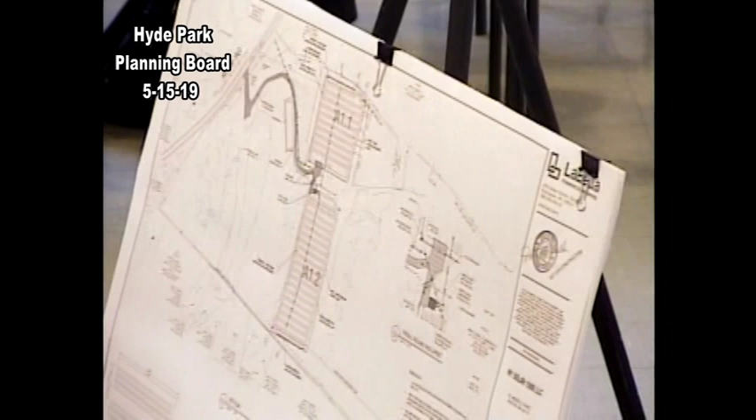We also put into the record last time that it's a seasonal kind of wetland. I've been there twice, and one time there was standing water, one time there wasn't. This is during the heavier rain season that we've had, like right now. So, thank you.

Okay, the overhead line issue was addressed in what we filed last week, included. I've also forwarded a communication from Central Hudson, which briefly describes their preference for overhead line at the interconnection point.

Right, I was going to say, our code requires it be buried to the maximum extent practical or possible. So we would try to bury it as it goes from the arrays over to the connection point, but once there, Central Hudson has a strong preference apparently for it to be overhead because that's what they're used to using. They're an organization slow to change, I'll leave it at that.

Okay, and for ATHANAS, the traffic impact issue we addressed in the filing. Yes, I want to thank you for submitting the traffic impact narrative so quickly. It enabled our consultant to go through and review it and fill out the part 2 for us.

Nope, that's it. Let me start with our consultants. Any comments, Ms. Axelson? Following up on the traffic, I was very surprised at the request for a traffic impact study, and I looked at your narrative, and it was very helpful. I did a little worst case based on a certain number of vehicles and figured out that there might be 144 total trips per year, which is 0.4 trips per day.

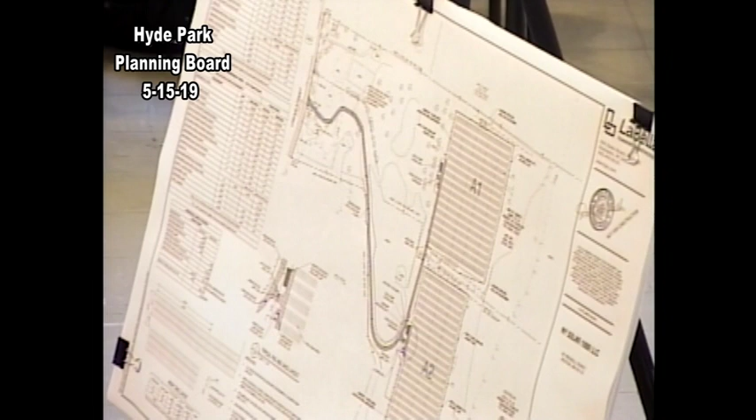It was confirmed after the last meeting that the electrical line that runs north-south will be buried. The electrical line that will transmit the energy down to the connection point is proposed to be elevated.

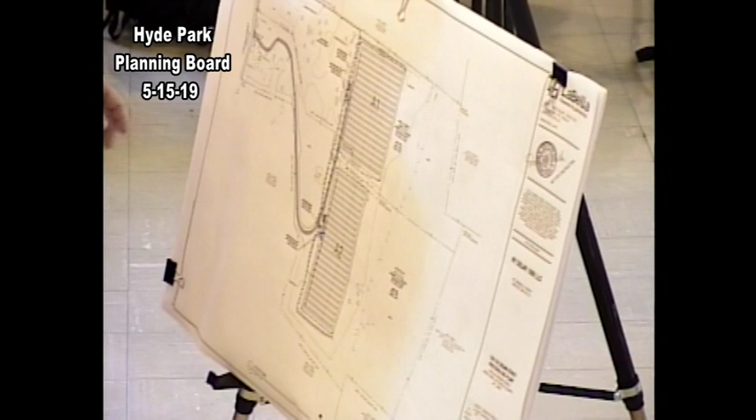That's actually shown on the other side. There you go. I believe there's 4 poles, if I counted correctly. Yes, along the way. The applicants have indicated that they believe this is better to hide the poles within the existing tree line. Also it will result in less removal of tree lines than if it had to be trenched and buried.

That certainly would please me, put it that way, because it means there's additional buffering that's intact, that's natural to the adjacent parcel, but I'll let the rest of the board address that. I think that was the only issue that was outstanding.

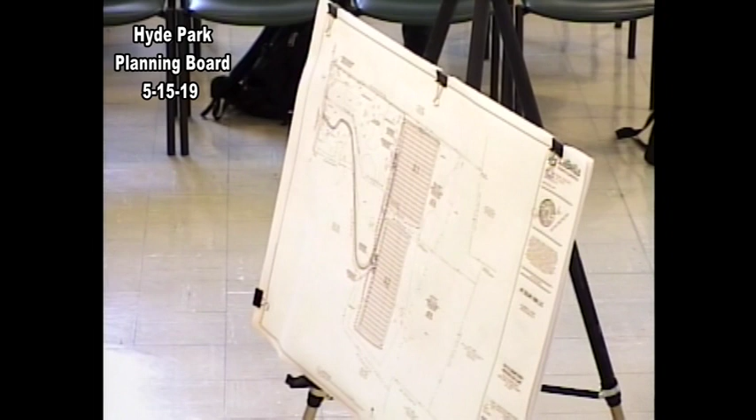Can you just remind me, we had public comment, where was the public concerned about? Along here, because this extends up—this is one of those spots where if you're across the street you would see the sunrise right around here, and they didn't want it poking through, seeing the sunrise through electrical lines.

So they're buried, and I believe Mr. Horan said he had no problems with it being elevated or not buried along the side, because that wouldn't really be in anybody's sight line, except for the property here if you're facing that direction or facing this direction.

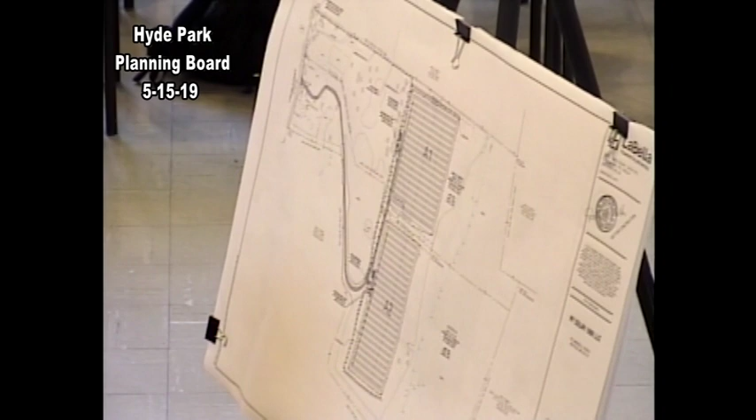Anything else you'd like to add? Well, since I'd given you linear feet of line last time which turned out not to be right, I just wanted to give you the new data: underground line comprises 2,330 linear feet and overhead now 1,080 linear feet. Again, as Mr. Dupree said, the east-west portion along the property line.

And the seed mix issues and the wetlands encroachment issues were similar—same thing, right. So nothing additional.

Thank you. Comments, Ms. Axelson? Actually, I have a question. I just looked at the submittal quickly to be able to speak about readiness for SEQR negative declaration on both Athanas East and Cream Street, but I assumed that we were to go ahead and do a thorough review of the submittal and generate a review memorandum. Oh, absolutely. Okay, fine, that's it.

Because we'll be in a public hearing in 2 weeks, and I'd like to have any comments on the revisions as we go forward. And whatever I said about Athanas East applies here too. Thank you, there you go, ditto. We're being very efficient tonight.

That's great. Comments, Mr. Satara? Not for SEQR, no. Any other comments you want to throw in now? No, I mean there's some items we're gonna be reviewing on their current submission. I know we had some on the drainage and the access road, so we'll look at those.

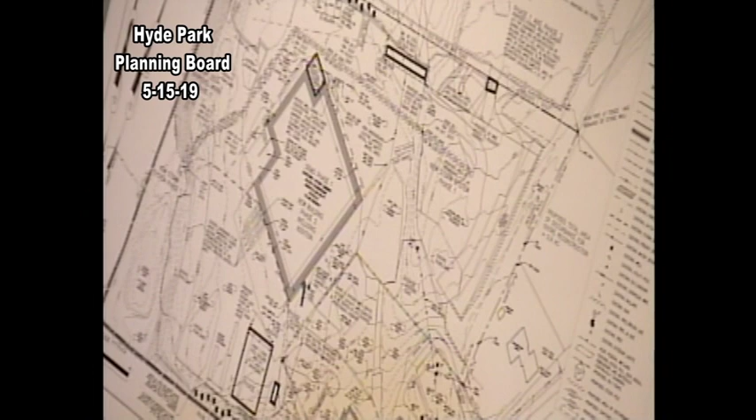Before the fire, it was tough because the building being like a beige color, it kind of blended in with everything else. And I'll point out that the reason why they're in for special use permit is there's already an expansion of the use. There's a storage area in through here where it was originally trees. And they're also proposing the addition of new buildings and to square off the corner right here, as well as a few other things. So they've calculated the percentage increase that they're looking for.

But let me turn it over to you guys, and please state your name for the record, and remember to use the microphone as you go around. And there's also a portable one, so you can pass that around, too. Okay. You're on. Joe Berger, Berger Engineering. Michelle Zerfus, Berger Engineering. Patrick Gleason, PLT. Laura Gleason Knoll, PLT.

Nice to meet you. We haven't met the other wife, so to speak, so far. The other wife. I'm not a wife. Unless you're a sister. Sister. Aha! I didn't know there was a third person. Oh, yeah. Patrick, Laura, Tommy. Yeah, PLT. Oh, PLT. Tom. There you go. Thank you.

Okay. Do you want to describe, I've already given a little bit of the actions that you're looking for, but do you want to go into detail for our TV audience? Basically, as everyone knows, we had a major fire on the site. The building has been basically burned at this point. We're still with the insurance companies on what's going on, and who knows when that's going to all be somewhat resolved. But we do have businesses on the site that employ over 35 people that we have to keep going. I just can't say stop while you guys find another job.

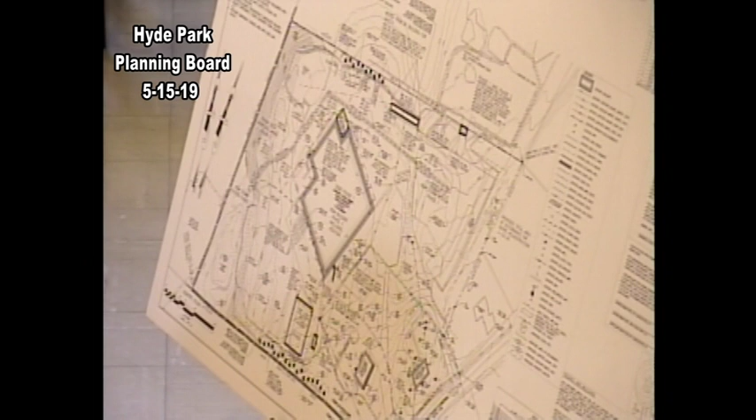So to be honest with you, the three issues for us are redoing the drainage from the drainage pond up, moving the fuel tanks to get them away from the building, and basically the little building, because we have our fingers crossed that everything can go right with engineering and permits, so that by October we have a place for the mechanics to go to for the winter.

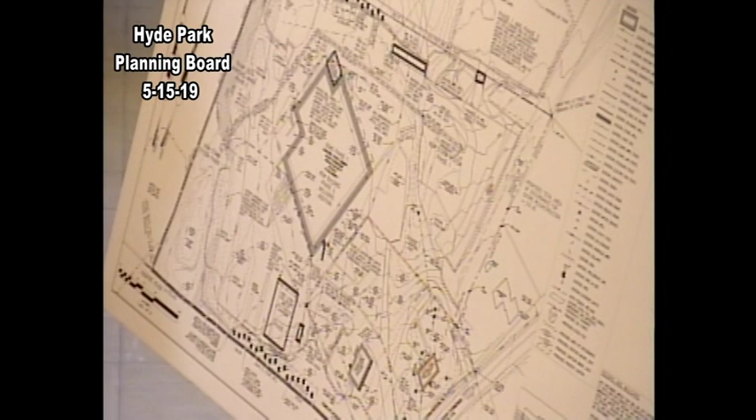It's just the struggle day by day of, all right, now what do we do? Let's try to do this, or let's try to do that. And like I said, even though most of the construction work is usually somewhere else, it's still the home base for everything to come back to at night. And the reason for going up into Mr. Baxter's property is that when we do demo the building, we're going to need a lot of room, and with everything going on, there's just not enough room at this point.

I don't know if there's any questions on your end. You'll hear them in a little bit. Mr. Berger or Mrs. Zerfus, do you want to add anything technical to what Mr. Gleason had to say?

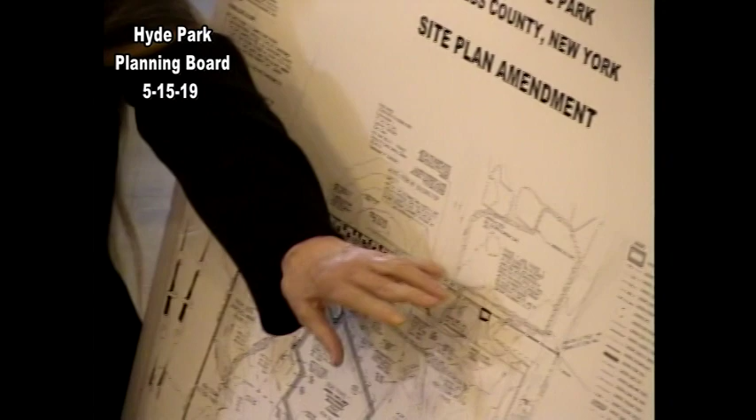You're going to have to hold it right up. The property line for PLT is right here, and this is their site. So what they want to do is just cut through; there's like one or two trees they'd have to take down to make a breakthrough here, go over to this property, and put down some material just to protect it. This is a big hay field right now. Then they can move stuff onto here.

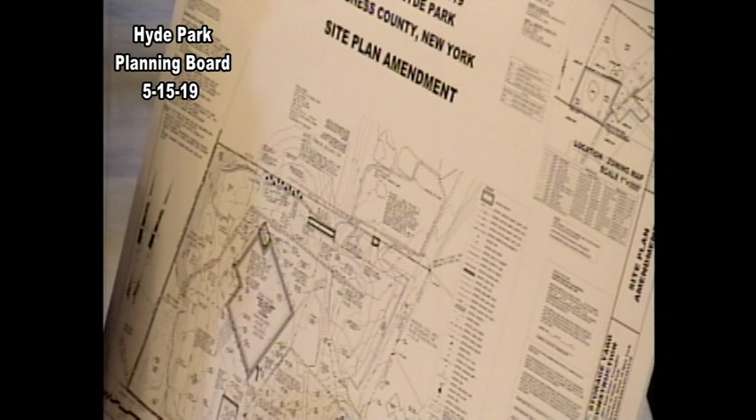There'd be silt fence and protection. That way they could work, everything would be up on here. Then when they were done and got all their equipment back off, they could restore this. The total disturbance would be less than an acre, about 7/10 of an acre up here, and it's a hay field they'll be going over. So that's what this extra is, a temporary pass-through, and because it's here, none of the stuff has to go out onto the road to use the site.

Can you explain the phasing, what goes with what? Yes. Initially, because right now the fuel tanks are right here by the building, and the building no longer has power, they've been having to use generators to pump fuel out of the tanks, which is kind of a dangerous thing.

So what they'd like to do is to be able to put these tanks up here as soon as possible, maybe even before a public hearing or anything, just for the safety. And now that the transformer's been moved from here to the power pole over here, they can run the electric line up to these so that it's a safer situation. The building inspector's been involved with the tanks, and they're also under the state petroleum regulations. So that is the initial safety item; they kind of want to move fast before going through all the normal steps. Then there'd be the phases.

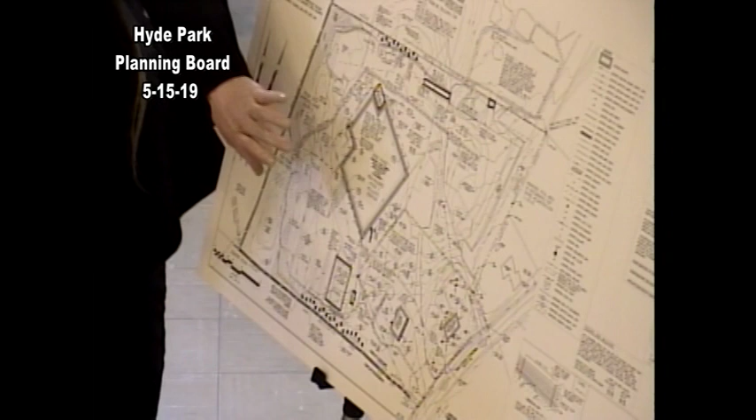So in phase one, it would be putting this building up. This isn't necessarily the order, but phase one would be putting this building up, opening this up so they can move the stuff, installing this new drainage system because of the roof leaders, and then demoing this building. That'd be phase one. Then in phase two, they'd reconstruct this building with the extra 1,000 feet, just squaring off the footprint. And this would be a new building.

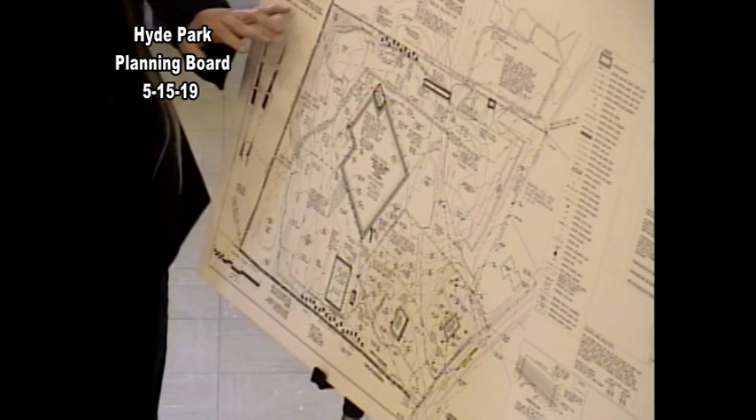And then they would restore this, and the town engineer asked for reconfirmation of the existing on-site wastewater treatment, the septic system. That would be done as part of phase two, just to confirm that it'll meet the new building. This new little building over here will have no bathrooms, so there's no need to worry about septic for that. So that'll be the phases. And those are individual phases, so you can get COs at the end of each phase.

Right. That was the suggestion that was brought to us, so we could get a CO for the little building before we did anything with the big building. And you have pictures of the little building right now? You just submitted them, right, with colors. Right, you just got them, I realized it was short. Well, I don't know about the demo. The big building would come back to you. Right now, they don't know exactly what is going to be on the big building because they're still working out other issues. So even though you don't have the big building right now, they would come back to you for the big building.

You may want to keep thinking about the phasing, because as it's phased, you have to do all the phase one improvements before you get that CO for your building. Okay. So, depending how soon you get authorization to start working on the building that had the fire, you've got the demo of the big building in phase one. Well, either that, or I guess we could call it phase one A. We just don't want to have you held up on getting the CO on the small building. Create three phases, 1, 2, and 3, make phase 2 the demo, and phase 3 would be the new building. Just think about it.

Yeah. That's actually logical, that makes sense. Yeah, because depending on when you can demo the big building, we don't want that to hold up you getting the CO for the little building. So why don't you think about that? Maybe we need to do it in phase 1, 2, and 3.

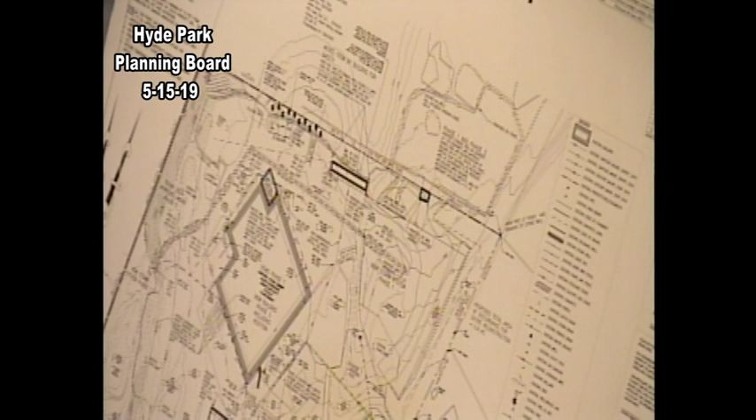There's an area just off the north corner of the larger building where there's a bunch of tanks and all that. And Pat, we want you to put on the plan what those tanks are. Oh, sorry, you mean up here? Yeah, I had the same question. They weren't on the original plan. So it's fine to have them here, but we just want to label what they are. So maybe you can just explain what they are. All right.

With the beet juice. Part of Soil Tech is, during the season, we recycle material and everything else. The other part of Soil Tech that we are into, because we had a building large enough to do it, is that we promoted anti-icing material with organics. Basically, the beet juice was added to all our products.

Do you mean beets, as in the beets? We're the number 2 producer of sugar beets in the world. And the sugar beet, which is this big, is where most of our sugar comes from. Unless it says cane sugar, it comes from a sugar beet. I'm from Louisiana. Sorry, cane sugar's what I grew up with.

All right. So what they do is they extract the sugar from a sugar beet out in the Midwest. They get it down to maybe 15%. They end up with like a molasses after they get it out. 95% of it is actually sprayed on horse feed and cow feed. It's the sticky substance. If anybody ever has sweet feed for a horse, that's the same material. Well, they found that the beet juice, when added to any salt mixture, enhanced the salt's freezing quality.

Instead of salt starting to not work at 15 degrees, by spraying this onto the salt, they were bringing it down to -10 or better. So the idea is that you would use less salt to get the same product. We've made it into a brine mixture of taking the salt, adding water to a 23%. We were doing that in the building, and we had storage tanks there.

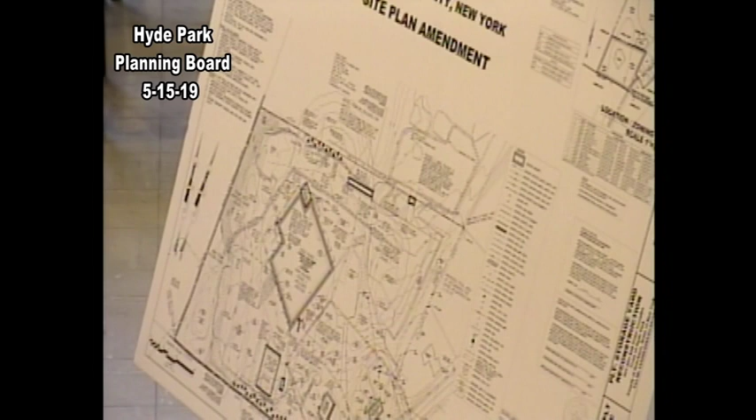The underground tanks that we had, which were basically ConVault tanks that we got from the Hyde Park School District, those are concrete reinforced steel tanks, that's where the beet juice is. Beet juice is pH neutral. It doesn't rust anything, so you can almost put it in any metal tank without fear of it eating through. Not like magnesium chloride or calcium chloride. That's why you always see them in plastic tanks. They can't put them in metal because it will actually eat through the metal.

That's really what kept Soil Tech people busy in the winter. When they couldn't work outside, we had this going inside the building. It was nice because you did all the mixing with the brine machine. We had a Cargill brine machine, and it kept people busy. That was the whole idea of it.

And as I like to say up here, we learn something new every day. Yeah, that's cool. Pretty ingenuity. Yeah, pretty cool.

All right, so if you can just note all that on there, what the underground tanks are.

No, I'm not trying to. Short version, I'm just saying. Cliff notes. Very condensed version. Fairly condensed. I don't mean for you to repeat everything you just said. Condense it and then zip it.

All right. Magnesium chloride above. Okay, so that's what those are up in that area. So, the other thing that we had noticed is down by the retention pond, in the back, it's kind of a little messy. Down that area, there's a lot of stockpiles out there that have crept down the hill towards the retention basin.

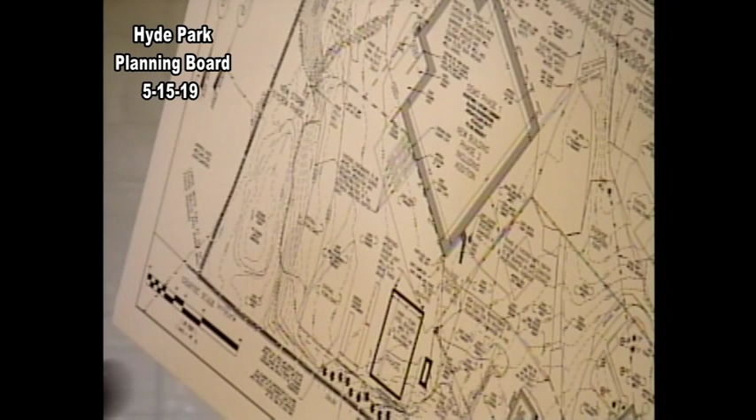The other thing is, there is a proposed fence that goes along the front of the building and then kind of cuts across where the access is down, and then ends up down by the house that they rent. Based upon our field visit, Pat, you can talk to Joe, but I think we basically said that the fence would follow where the silt fence is now, so you'll hook over and make some modifications to that. Yeah, we could add that.

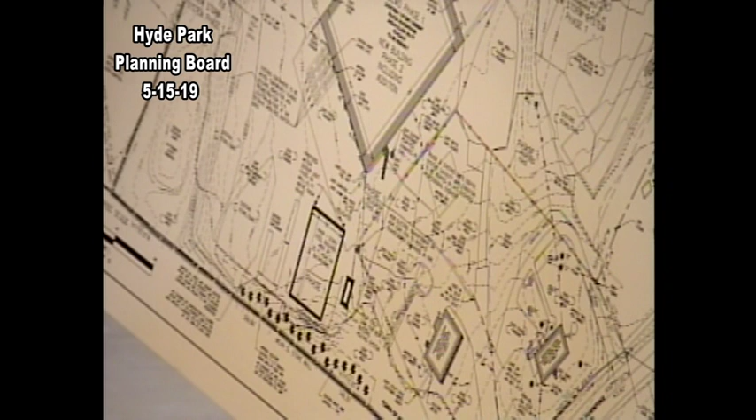And then the only other thing I wanted to mention is on this plan, there's several pine trees that are shown. Some are north of where the beet juice and brine tanks are, and then there's also many shown to the south of where the Phase 1 building's going to be.

I'm sure they were planted at one time, but I don't think many of them made it, so there's not the screening there. That's something we'll have to work through. I don't remember if the code absolutely requires it, but I think it does because it butts up to residential zoned property, so yes, it does.

Just for our newer members on the board, when this was approved back in 2012, Ms. Gleason mentioned stormwater detention ponds, et cetera, were not all completed. There are a variety of reasons - there's a pipe connecting over here that's going to be corrected now. So there was no CO given. Site plan conditions were met, but they never got CO, or most of the conditions, because of some screening in this area. That will be cleaned up this time along the way.

Anything else? Not for me. Liz, I don't know if you have anything, Ms. Axelson?

Just quickly, what I'm going to do is take a look at the 2012 approved plan, compare it with this one, and come up with some requests for clarification, some revisions to reinstate certain things. There was an area of clearing, a note in the northeastern corner about clearing what's there now. There seems to be a buffer around it and a berm, so we'll want more details on that. And then the other idea was to look around the perimeter of the site and make some comments about places where there could be some filling in, a little buffering around the edge. There's a lot of vegetation around the edge, but those are the main things. It'll be a comparison and laundry list.

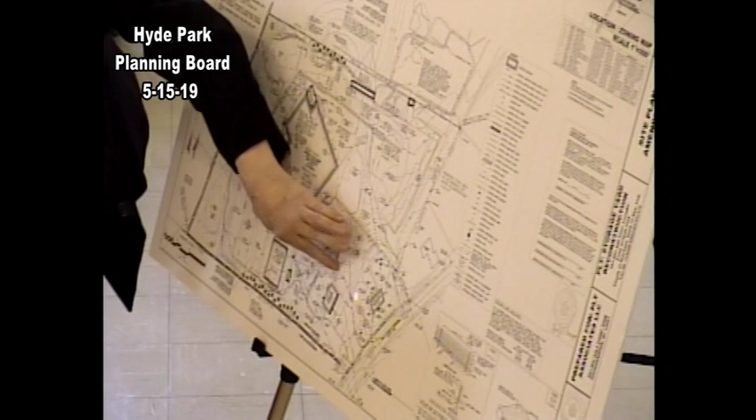Can you point to where the V is? It's hard to see. Point to the area where the septic system is. It's where the driveway splits, right where the sign is. So we don't want to disturb over the septic.

When you come here and glance up, you see the dimension of the building, which has real height. It just breaks the bottom half of the building. So rather than invest money down here with big trees hiding something that is unhideable - it's like parking the Titanic.

I did have a comment also, I know it's a little early on, but you submitted the colors we talked about. You made a comment earlier that it used to be beige and it disappeared, nobody could see it at first. The colors you submitted are different - the actual sketch looks pink.

You tried to pick that existing building color that's tan. I tried to pick the one that's marked, but because of its size and because it's part of the approval, we need to have a better understanding of what the actual color's going to be instead of pink.

That's the small building you're talking about. This is the small building - they don't have anything for the new, bigger building yet. So they're not going to match, not going to be consistent in color. They haven't designed it yet, haven't gotten that far to even think about it, to be honest with you.

I would just encourage you to look at the colors, because really, where the small one is, I don't think anyone will be able to see that building from the road because of the office being directly in the way. That one's more hidden than anything else.

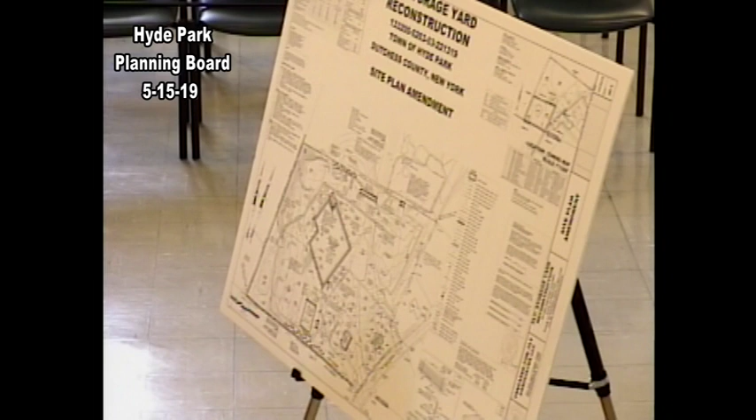So my only other comment was, when we were walking the site, it does abut - this is a neighborhood business, and it abuts some residential zones. I think the code says that if the neighborhood business is abutting the residential, there will have to be some kind of screening. So that'll have to be refined and shown.

Our problem is really on the west side, trying to deal with being 35 feet above the other ground. There's not much I can screen.

I'm looking up just like this, sharing Tad's comment. I didn't hear that mentioned yet today.

The difficulty on that side is that the soil tech recycling is there, and it's really difficult to promote anything. That's why coming up the embankment is basically riprap, because there's no lawn there. You go from one to the other. I can try planting trees, but it's not a place that promotes tree growth, not like the other side where you're in woods both ways. There, I can get trees to grow.

But on that side, I think it's because of this. I don't know exactly what to do. Well, you have a consultant, we'll figure it out. I'm sure we'll get to a conclusion.

Screening can be vegetative or accomplished by fence. When you're talking about huge heights, if it's the fences along the property line, it can only be 6 feet tall. That's not going to screen out much other than your ankles. I'm going from this to this. I really don't know what.

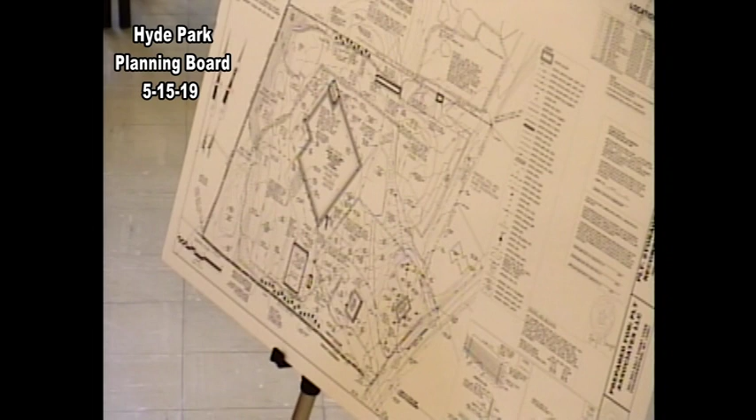I haven't been to the site. Can you just clarify where your employees park? Down by the main building. Basically, you go up the driveway, and they park right where the office is, on each side. You can fit 35 cars there now? Believe me, we get cars there. Some of the employees have company vehicles, so they're there, but they're not parking.

They have their own company vehicle, so they come in the morning, but then they take the vehicle to go to the job site. So it does phase out, and they're not coming in all at the same time. Part of that you have to remember too is that I've got 5 to 6 people working in the office at the other parking lot, the building down below.

So, parking there also. One of the reasons I'm asking is because your scale calculation is areas of use plus parking. And so I was trying to figure out. That's why I asked Michelle to show how the parking was calculated. Well, exactly. And it could maybe fluctuate. So if you could hatch it in or something, so when we check the calculations.

We could do that. Actually, I'll clarify that what Tad wanted was basically the open area to footprint to be parking space, which would include drives. Not to do this in a traditional parking space, not counting drives. Tad, back in the original one, said, just take whatever's hard gravel or whatever, square feet, and that's all counted towards scale.

Everything towards the use, because there's not defined parking spaces. Right, okay. It's a little higgledy-piggledy. Hold on. And there was a very specific table that was on the 2012. Yeah, no, I saw the table. Well, we'll clarify it and how we discussed it with Tad and provide it.

Our employees, in the wintertime, obviously, we drop down. But some employees, on some of our projects, they don't come to the office, they'll go directly to the job site. So it does fluctuate in that regard. Besides the people who work in the office, I can't tell you an exact number from date to date because it does fluctuate depending on the work.

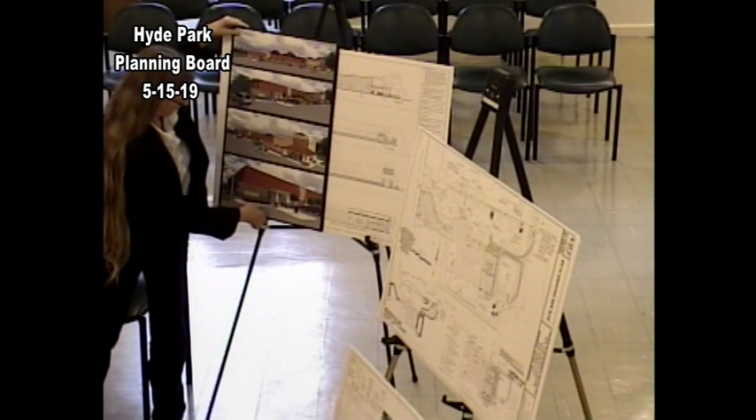So, no, not quite. Joe's doing this one. He's letting Michelle. Don't breathe.

Let me turn it over to you guys, and you can talk about the proposal. Okay, I'm Michelle Zerfus with Berger Engineering. Take it closer. Yeah, your voice is low, sorry. I'm Michelle Zerfus with Berger Engineering. Chuck Liscombe, McCormick, Van Voorhis. Mike Kaminsky, President CEO of Hudson Valley Hospice. Do you want to take the lead, Michelle? Yeah, I'll take the lead on this one.

What's being proposed is an addition to the existing administrative offices for the Hudson Valley Hospice. This is just an office building. There's no medical things that go on inside the building. They also want to expand the parking lot, because presently the parking lot is always filled, and they've been parking over in the Page parking lot, but even that is just about at capacity. So that's why they want to have some extra spaces for themselves.

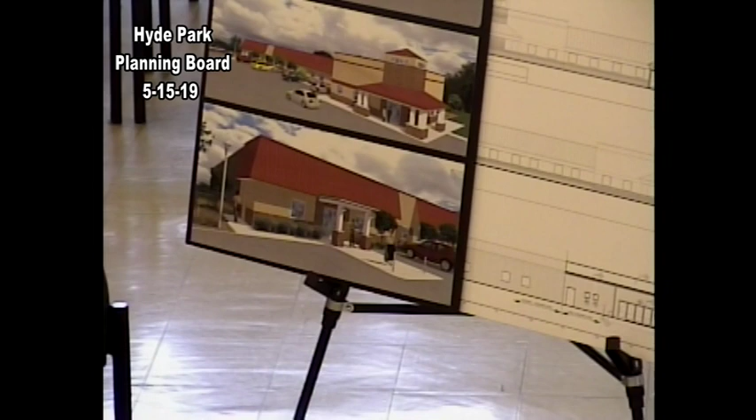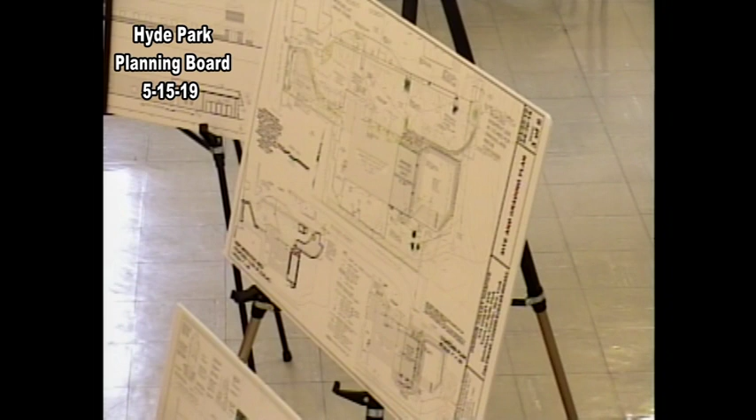As you know, this is a part of a bigger subdivision, so all we're doing is focusing on the site plan. Correct. The overall scale is not really a focus at this point, because the scale is being developed with the site plan. And so the scale in these plans may be revised. Can you repeat that? The scale is a part of these plans, but the subdivision, I've got to see the housing dwelling units and things like that.

Right. So the parent parcel is not owned by your client, it's owned by the Pages, and they'll be the ones to assign dwelling units? Right now, yes, they seem to have assigned all the dwelling units to you guys. Interesting, because I can't really see you putting housing up behind yourself. It'll be a very tall building. Skinny and tall, yes. It'd be like a Japanese building with just a little cubby. We believe that's a mistake on their part. We believe that they want to put it on one of their parcels that extends all the way back with the high ridge line, where it'd be difficult to put housing anyway, but it is a possibility. This has been discussed before. Everyone's pretty much aware of what's being proposed along the way.

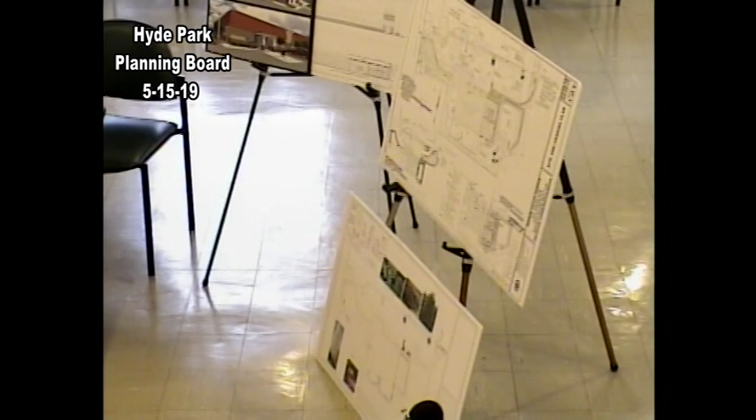The one thing we haven't resolved yet is there was a percentage increase of scale for the original parent site when they improved the building that's Fresenius, I believe. Right, dialysis. Yep. Fresenius, that's it, thank you. So if, just for example, their base scale was X square footage, and they got an increase of 5%, then they need to figure out how to allocate the remaining amongst all. Right, they need the biggest expansion, they need the only expansion right now. Right. So if they allocate it purely on existing square footage, then this project needs a variance from the zoning board of appeals.

But if the parent parcel, let's say there's 50,000 square feet that could be built out still, if they don't give any to that insurance building up front, which probably doesn't have much room to grow anyways, instead of allocating some of it, they could give all the percentage over to this lot, and then they may not need a variance. So, you know, is that making sense to you?

Yes. Well, I'm trying to explain to the board. There's a total number of square feet that are left to build out of the whole site. And so we're waiting on the subdivision calculations to come back to see how they've allocated that remaining building potential. And all that this affects is that they might need an area variance. Right now, it looks as though they need an area variance, so we'll see.

Yeah, the first step would be to calculate the available scale. That's what we're waiting for ourselves. Thank you. And once that's done, it'll become clear to us and to the town where it's going to be allocated. The allocation will be between the page and my client to determine what they want to do. And then we'll come back to you with that. But the first step is, what is the scale?

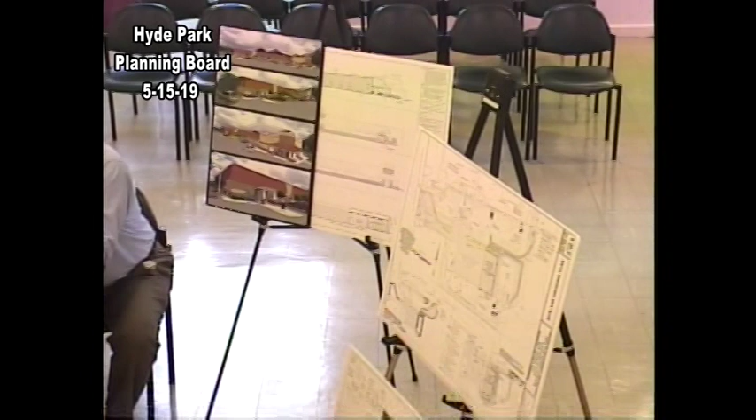Yeah. And you'll also have to include the tiny vestibule increase. Yes, understood. It's not much. Yeah, but you have to add it in. We understand. That's what everything is. Every little piece, we understand it. Yep.

Anyway, the subdivision is probably the most complicated part of this project. We believe it is the most complicated. Oh, it is. After that, we have 4 separate site plans that seem fairly easy to me. Then the water and sewer. It should be reassuring words to you that it sounds fairly easy to us, so just accept that. Anything else you guys want to add about what you're doing?

Well, yeah, the reason we're here tonight is because we'd like to get some of your input on the site plan features, so that as the subdivision's worked out, we've worked out some of the different features. And you're going to hear that.

There's a reason why Mr. Liscombe is here. I gave him a heads up, although very limited. Yes. I'm surprised you made it here, Chuck. That was very nice of you. Thanks. Oh, good. I was thinking there might be a hot meal waiting for you at home that's not going to be cold. There you go.

Anyway, that was what we had understood, and when they transposed the tables, they just didn't add a column in. So my understanding is that those 78 dwelling units are supposed to be attributed to Lot 2, not to Lot 1. So it was mistakenly shown on another plan sheet to be attributed to Lot 1, which surprised me, because that wasn't what I had understood.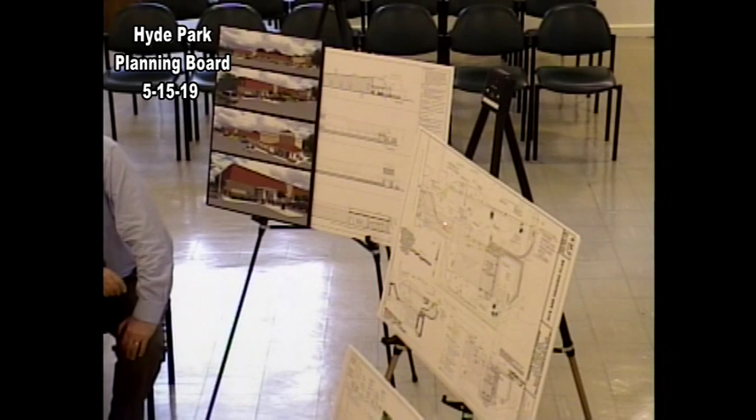We noticed that there was a pillar on the corner of a building, and so we're going to ask you to provide pedestrian ADA accessible access via sidewalk and curb ramp to get around that. It just happens to be the way the sidewalk and the corner of the building and the pillar are positioned. Where there's now a parking area shown here, this is now striped for, we don't know why, maybe fire access, but that doesn't seem to make sense. So you're proposing adding parking there, so you don't have to expand so much parking there.

There's a sidewalk here that if you got out and tried to use it, there's no way to cross the pillar right here. There's maybe 8 inches? I mean, a little skinny, teeny thing could cross through, but it wouldn't be ADA compliant. So if you're going to show an ADA space here, I believe you need to show a drop curb somewhere so people could get access to the sidewalk. That's all. Is that a right way to describe that?

Yeah. It's the west side, I think. I mean, the south side. Yeah, when we visited the site, it was very obvious that you couldn't, right. It more or less dead ends into a column. Do you want me to point it out?

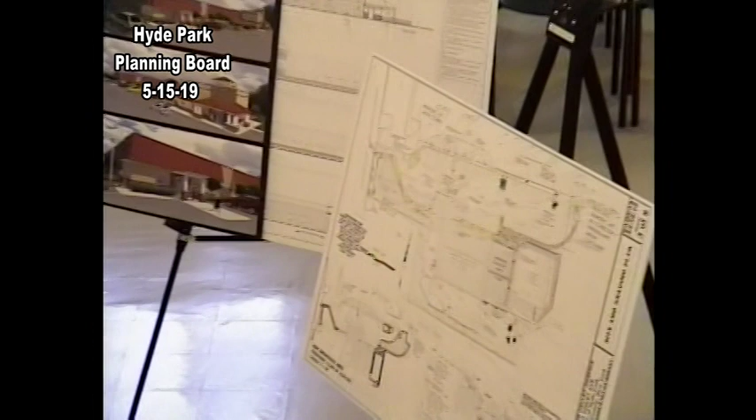My turn? Yes. Most of my comments were taken care of. We had given them some comments when we had an offline meeting about changing the parking area to the east. They added a sidewalk in front of the stormwater pond, continued the fence all the way around the retaining wall. So the only thing left is to take a look at their drainage report. As far as the engineering comments, their office is taking care of those. But I'll just look at the drainage report.

Thank you. A note for Victoria, a question. Normally, we see deed restrictions, easements, some reference to them on plans. If those are conditions of subdivision and they're not done, how would we ask for what I would call maybe an as-built? I think by the end of this, we'll know where they're going to be located, and they will be able to be shown on the plans. Okay, good. We're just not there yet.

Okay. We anticipated, once the subdivision got to the point where we got that information, we would go ahead and add everything. But since we're not involved in that, we don't know it. Once it comes to us, we'll add it. Yeah, the subdivision is driving all this. We anticipate that once it gets to final approval on the subdivision, that data will become available to us. Well, let's hope it's not the final approval. Let's hope it's somewhere earlier along the way. By final, I should know.

Mr. Kaminsky's under time pressure for this from the state. Yes. Ms. Pollard, do you have any comments? We've already touched on the fact that there are several legal issues that need to be resolved, but most of them involve the subdivision, and we haven't had a new submission yet, so they're to be determined. Thank you. At our agenda meeting, Mr. Waters had some ideas as to architecture, so I'm going to start with him. Yes, hi.

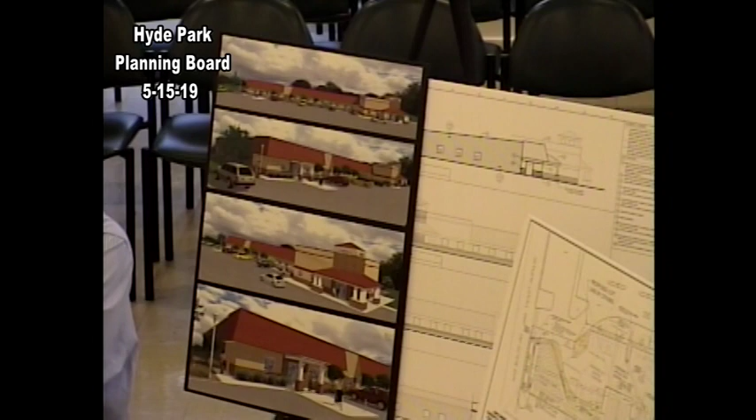Those are bathrooms in there? They're mainly bathrooms and a mechanical space. Where the window wall is, that's the lunchroom. Is that on the new structure? Yes, that's on the new structure. That's what I'm talking about.

We were talking about the old structure, if there was something that could be done, since that's becoming a garden now. I believe that garden is wrapping around, is that correct? Yeah. It would be nice to have more visibility to that.

I was saying, if you can't change those window openings and change the sizes, which would be a major remodeling, it would possibly be better to do an element over the top of those, like a solar shade or something, as an architectural embellishment that might add interest in the garden too. It was just a thought.

The trees that are there, I believe, are pines, and they're really tall, maybe 100-foot pines, and the undergrowth is all gone, so they're really not screening it much. You could see the road from the back of that building. So without seeing the planting, or how that garden is going to lay out, I thought there might be a way to do some kind of a solar shade or something.

Well, there's a really nice bereavement garden there now. I guess you've seen that, yes. And the idea, which is fairly recent to me, didn't start out as part of the program, was to extend that garden to the back. Frankly, we've left that up to the landscape architect. Perhaps they could do a green wall there, they could do something, but it hasn't been part of the project to date.

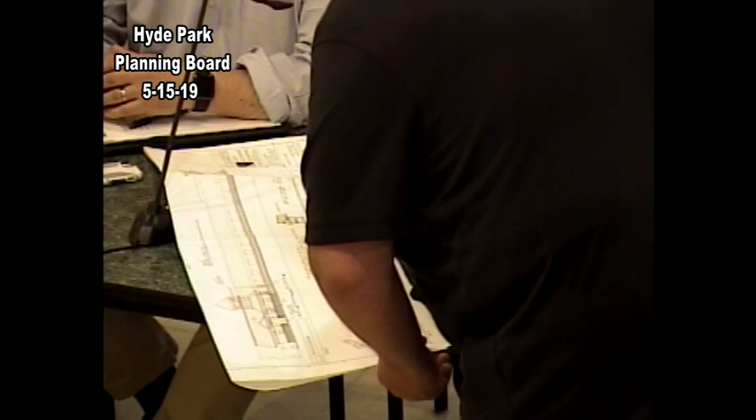Well, I'll do the plat. Especially if people are going to be out back near those windows. This is where the garden comes around, right here in this space, comes around the back. I'm just talking about some kind of a detail, because now with the addition, the walls line up, and it's a larger span than 100 feet of continuous wall, and we believe there's a rule in Hyde Park that you can't have more than 100 feet.

I sent them the section of code, but I can find it here too. So I was thinking maybe this architectural element here, at the entry in the garden, is one. Give me all that stuff. Right there, that's a door, that's a door to the mechanical room.

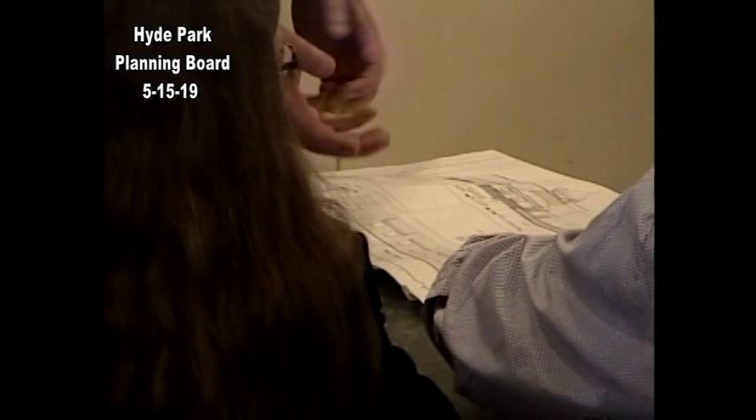I don't have the interior layout or floor plan, so I don't know what those rooms are, if these are cubicles, I have no idea. My thought was those are occupied spaces. So in doing that, this is now 92 feet from here to there.

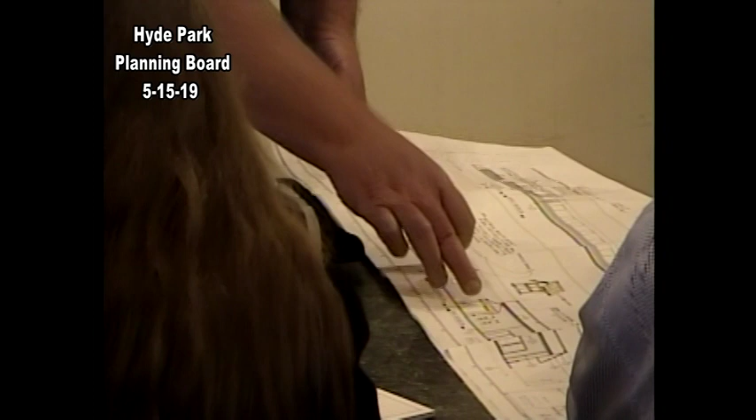So you can see this is much more than the 100, so we need some kind of an element. These might be that element. That would help. I'll discuss it with my client. You accept that as the element? Yes, so let me read the code.

Large building design where the building has a facade longer than 100 feet shall present the appearance of a grouping of two or more well-proportioned buildings, incorporating L's, wings, verandas, porticos, courtyards, and similar elements as unifying features. The board has allowed certain kinds of elements on existing buildings we're just expanding, so you don't have to put a portico or an L or anything else. We've allowed architectural embellishments, I'll call them, where you're breaking up the mass to function this way.

We would not do this if you were proposing a brand-new building longer than 100 feet, then you'd have to articulate it more. Because you're just expanding existing, Rob is looking for creative and low-cost solutions to give some visual emphasis.

Right, okay, is it okay if I take pictures of it? You can have it, he'll give it to you. You're not going to bill us, are you? No. That's Mr. Liscombe who does that, we'll take care of that.

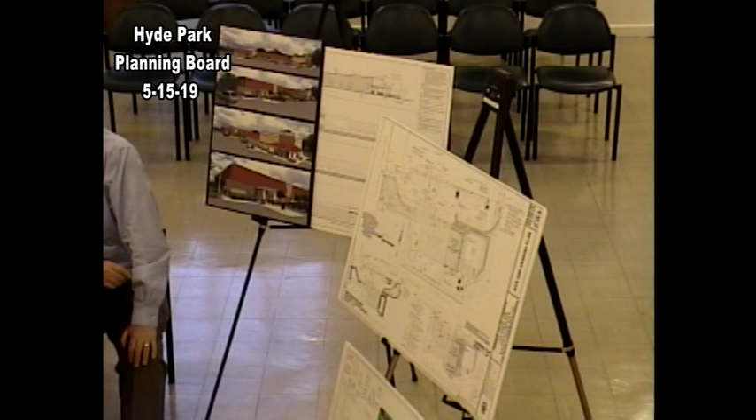With the turret above it, this one, northwest corner of the building. It will remain. Then getting to that structure, that cap on that tower, turret roof - if you look at it, there's no soffit, there's nothing on it, and it doesn't have weight or body. That's why I had drawn this, in case these windows need to be replaced, if there's anything failing, now would be the time to possibly do a different kind of roof structure on that.

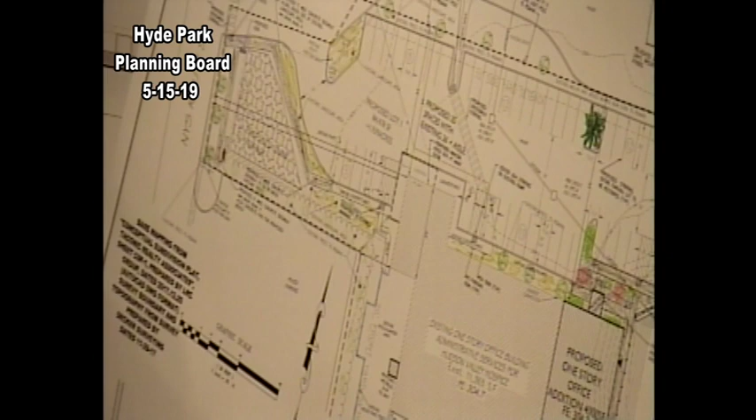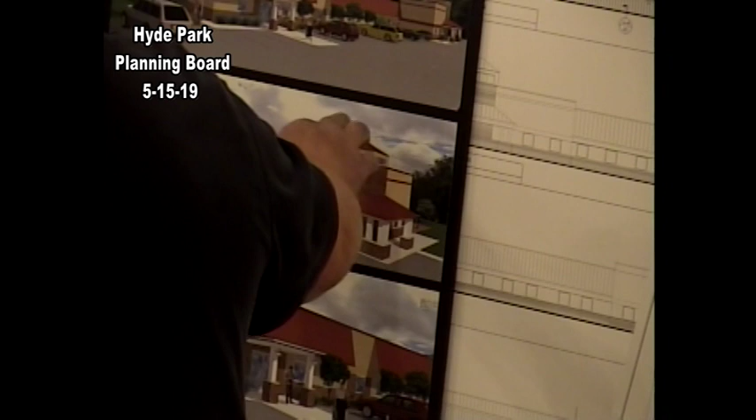You're talking just over the little tower, right? Just the tower at the entry, to match the other. Well, if you look at it, the roof line goes right to the edge - I believe that's the soffit, is that correct? Yes. I'm not sure, it just doesn't look like it really caps the structure. So I was saying, if these windows at some point are going to be replaced, possibly do a different roof cap and change the windows out now. I wasn't sure what was happening down here, but you have the same problem with the 100-foot span at this line.

Well, what we did is make a break between the two. The mansard roof was discontinued for a section, and we put an entrance out there with a covered canopy. But we wanted to diminish the size, we don't want people going there, we don't want the public going there. We want them to go to the existing main entrance. That's for deliveries, where the UPS truck goes, and an employee entrance.

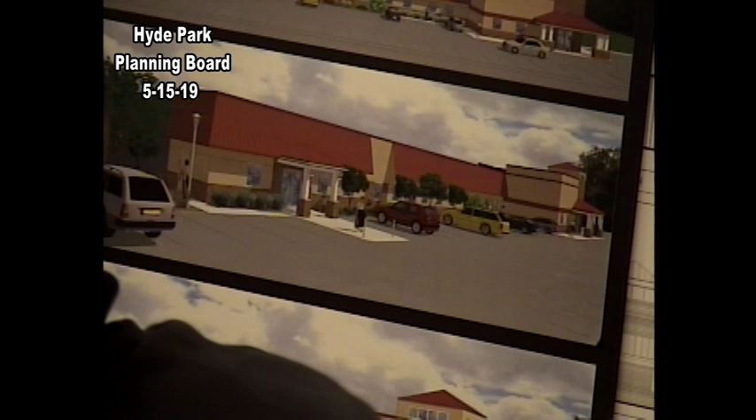But most of it is employees, correct? That's the way it was explained to us, that it wasn't really patients going there. No, there isn't anything like that, no clinical space in the building. Bereaved people come there, though. Correct, but there's no clinical use of the space.

That was the reasoning for breaking that roof line, to give us that setback. One of our initial concepts did not have the mansard roof continuing. I expressed a concern about matching the color, but our client preferred that.

If there was no mansard roof, what were you going to propose, a flat roof? That would be a solid section there, continuing the same striping around the building. So you'd have a flat roof building. That's not allowed under our code.

You'd have to have some way to disguise it. That's another reason to keep the mansard. Are you considering a non-flat roof? I'm just asking, does the code prohibit flat roofs? Well, it doesn't have a flat roof, it has a low slope roof.

Which is very expensive. The mansard? No, the low slope roof. It has a slope, a very low slope, it needs a parapet. That was the other thing I thought about.

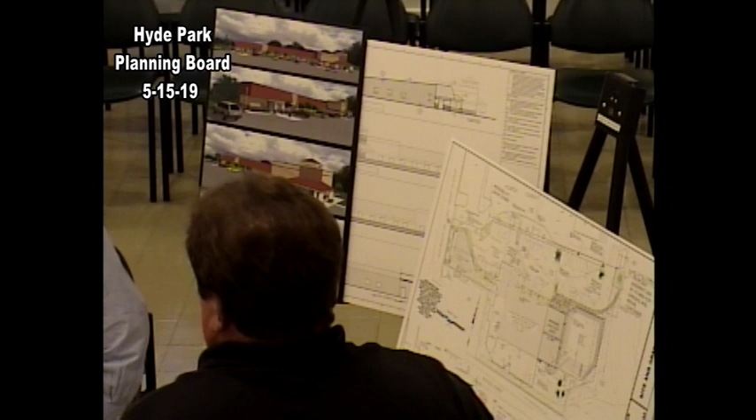When I looked at the picture Mr. Waters had drawn for this tower, I did think adding the soffit and a lightning rod made a big difference. Just raising the pitch of that, it looks so compressed. But that's up to price point, because it's an existing part of the structure, the original main entry. It's been there for 20 years, and it wasn't in the program to change that. Correct. There was nothing budgeted for it. We just addressed the addition.

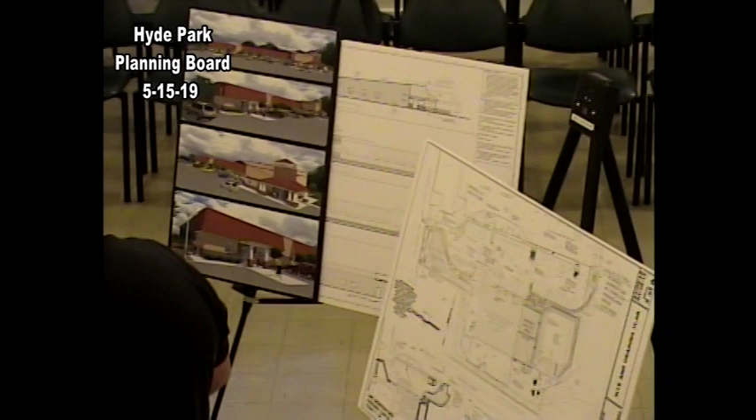So it's nothing personal. When the board gets a site plan, they look at everything and where they can make improvements to the site. That's why we're here. We understand. I know the directions you're given are something we haven't heard, so I respect why things are drawn certain ways, but I'm just trying to say, how do we meet certain parameters that are good for everybody? I'm listening to your suggestions.

Tell me once again why you think this is important. Well, it just gives more lift to the structure. That cap on here, to me, looks like it's imploded. Whoop, watch out, Joe. Like that, it did implode. It doesn't have dimension. All right, so again, let me have the opportunity to talk to our architect. Yeah, this is nothing to be decided tonight.

That's why we're in a workshop, so you can hear back. We wanted feedback, so you're getting it. And you might come up with a better solution, or something else. I don't know if we can do it at all, but I do want the opportunity to look at it and discuss it. Absolutely. It's an opportunity.

This is the most visible portion of the building to the public, because it's the front, it's the entrance, and it's most visible from Route 9G. Right. So I think it would be an opportunity to dress it up and give it more emphasis, to make it a building that you can be proud of. That said, this is up to you guys to discuss and decide.

Thank you. The important part is that you've got to break up the long mass, and you did that on the front by adding the new entrance in the portico, which I got. But the back area, because it extends, it needs something, and I think what Mr. Waters proposed, a simple little trellis, something. Window treatment. Yeah, it'll give it a three-dimensional oomph. Wasn't aware of the concern, we'll address it.

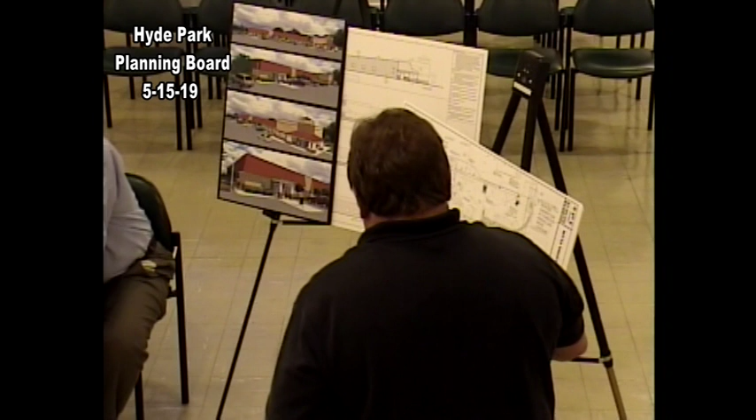Thank you. Sure. And then that happens here too, on what is now the east elevation, that pitch, to extend the wall. But again, to me, it just looks like a steel shed. Well, there's definitely nobody on that side. That's the side where the deer will look once in a while. That's a cliff. That's about straight up. Okay, so, got the pond and all this. By the way, that's where the density will be assigned, is on the cliff.

Right. But if we do the parapet across there, or continue that roof line, you should probably turn that corner, because it would look naked just sitting there. It'll look like an old West movie, you know, Wild West and false front. False front, yeah, sure. And that's not what the intentions are. Correct. Nor the direction to give you to do that. So I think that was pretty much it with what I had. Do we leave that with them?

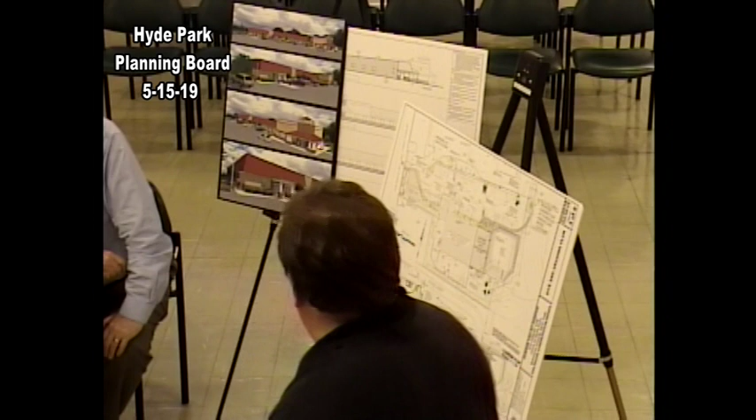Yes. Rob? Okay, and then just breaking that up, if that goes in here, then that can go away. It doesn't matter. And maybe do something here. Yeah, that would be great. By the way, this is where that sidewalk, this is where you can't move, right there. The sidewalk literally goes in and there's just no space there to walk around that area. You can go to the right or go to the left, but you're on grass. So we just need to have maybe a drop curb or something through there. It's access into the garden back there. Right, but if you're just walking and want to go into the main entrance, you're going to be shimmying. We'll look at it.

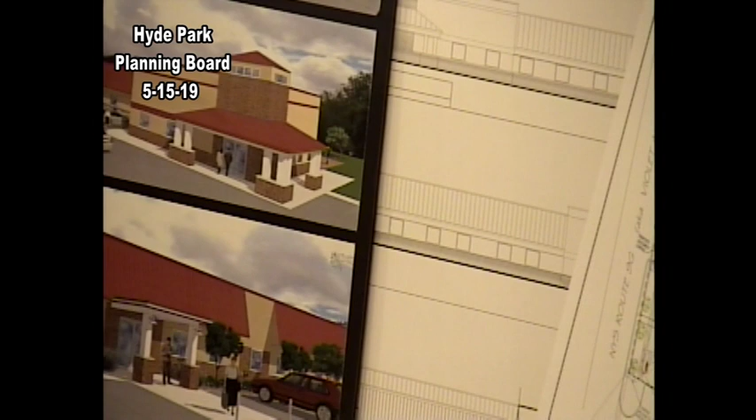Thank you. Ms. Dexter, any comments? Not really. I'm intrigued by Mr. Waters' ideas. By the way, his ideas are incorporated throughout town. He has made some very basic ideas, I think they can make a huge difference. But I understand the cost.

Ms. Wasser, comments? You looking for something in the code? Yes, I'll find it, not right now. Okay. I just wanted to reiterate Rob's comments, my colleague's, because I was the colleague that talked about the length of that elevation, and encourage you to give it another look. Thank you. That's it.

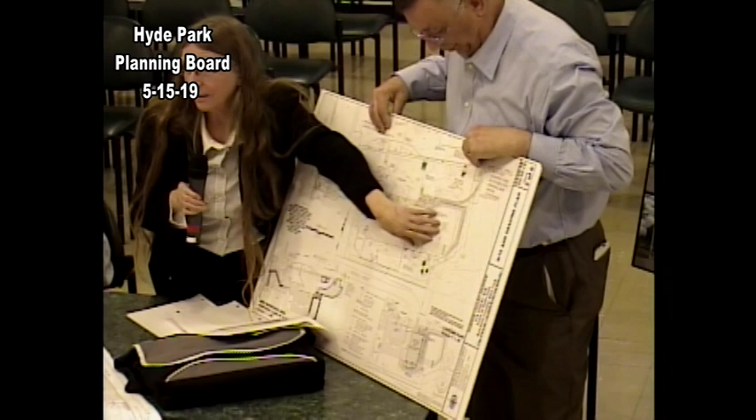Mr. Pickett? A question: around the catch basin, there's a proposed retaining wall with a 4-foot-high black aluminum fence. Can you describe it a little bit more? You're not gonna have a wall with a fence on top, are you? Microphone, please. Sorry. This is a detention pond. In order to add this addition, the existing detention pond had to be modified, relocated. So we had to make it steeper. So yes, this is a retaining wall right along here. Is it going to be above ground or below ground? It's basically going to be below ground. It's still the pond, just the pond wall instead of being grass like it is now.

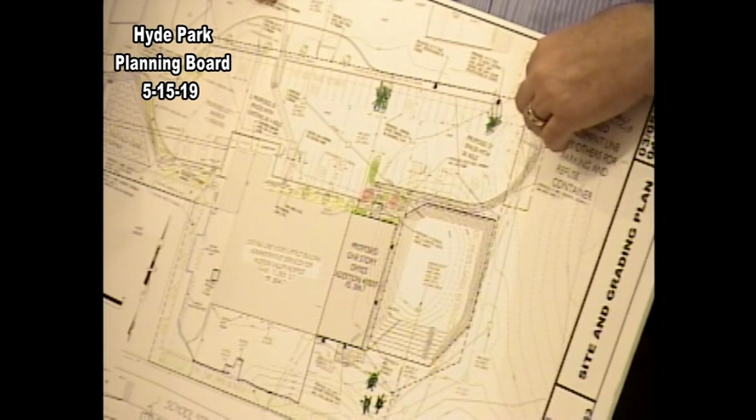Okay. So it's gonna be essentially at ground level, and then you're gonna have the fence attached to that? Steeply sloped, not vertical, but steeply sloped. It's going to look like the fencing around a pool. If you look at it from a distance, it's going to look like there's a big giant swimming pool there, but it's dry. I just wanted to make sure. A 4-foot concrete wall, and then a fence on top of it.

Gilhooley is down on, we used to be down on Route 9? Yeah. There's the new bank that's there. There's a retaining wall there with a fence on top. It's for a different purpose, but it'll look the same way. Okay. It has a fence sitting right on top of the same style retaining wall, which is about 4 foot tall. So if you want to see what it visually looks like, that's a perfect place to go to look at it.

Okay. What happened is when they relocated the stormwater detention pond, it now has somewhat steep but softer sides because they haven't got a lot of room. When you push it east, you go right up into the slopes that rise pretty steeply. Yep. So you're having to put in a retaining wall in order to retain the water there. That's basically all there is to it. And there's a sewer line there we can't move. Correct. So the sewer line and the slopes kind of prohibited us from anything else. So we kept the softer slope toward the building and the steeper slope away for safety reasons. Which makes a lot of sense.

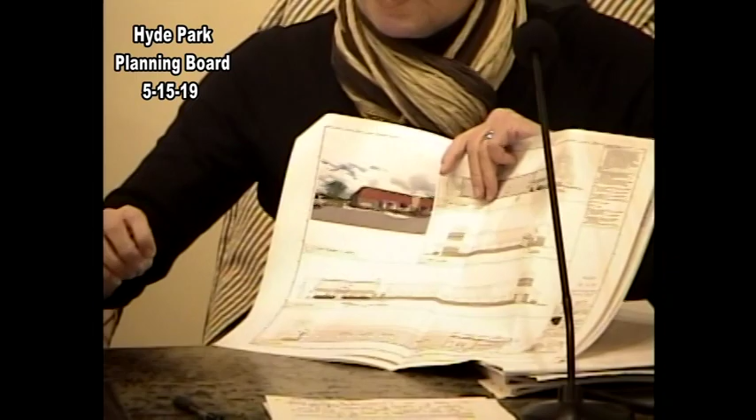Any other questions, Mr. Pickett? No. Ms. Weiser? I actually support Mr. Waters' original idea to make this entrance replicate the original entrance, because again, you have this roof line that just keeps going. So to add the tower here, a smaller version of this, is going to break it up and create an architectural balance for the building. It'll improve the appearance greatly. Without this element of height, I think the building needs something to balance better. I think that's an important feature.

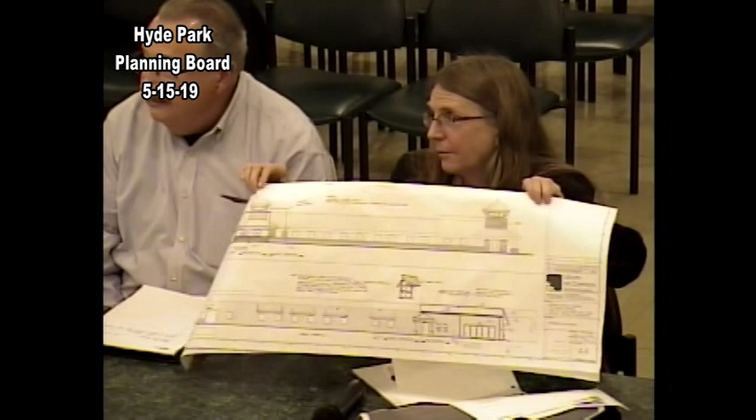I know he took it away, but I still like it. That's it. I didn't see that one. It's in Rob's. See the tower there? Looking to replicate. Oh, I see what you're saying. So it would have more than one tower, like the existing one. That balances it out. Like in a grocery store where there's a bigger one and a smaller one? Yeah, like a baby one. It balances the building out much better. Well, these are things for the applicant and his architect to consider.

I'll make my comments pointed like you want them to be. I fully approve of, let's hope that the fire department allows us to use this. I don't understand why that was a fire area in the first place. A fire department, if there's a fire here, is going to pull right over in here to fight it. It's not going to sit there at the very end. This is silly. And it's just empty blacktop sitting there now. So let's utilize it and make it into some parking.

And I can comment on that because we've had false alarms in the building, and every time the fire trucks pull up in the parking lot and stay right in front of the main entrance. I had firefighting class for 4 summers when I worked offshore. You're going to go to the central point and stay away from it. That's what you do. Even if a fire is in this corner, they're still probably going to come here and shoot it rather than sit there, because it's a safer access. Or park on School Street, depending on where it is.

Otherwise, I like the sidewalk coming from here. I know it's a lot of expense. That's why once we start asking for sidewalks, I know how much it costs, so I'm always willing to forego some extra elements on the building, but I applaud any effort to improve the aesthetics of this town. And 9G has been aesthetically challenged for a long time, and we've been working hard to try to improve that.

I just spoke to Mr. Baxter, who told me he's coming back in for the assisted living facility, wants to redo the exterior and expand it in the back to add more beds because it's completely full right now. Wow. So we have an opportunity here to really dress up this area of town, and it's an entrance into our town. And for the 9G residents who complain to me sometimes that we're the forgotten area, I always tell them, we don't propose things.

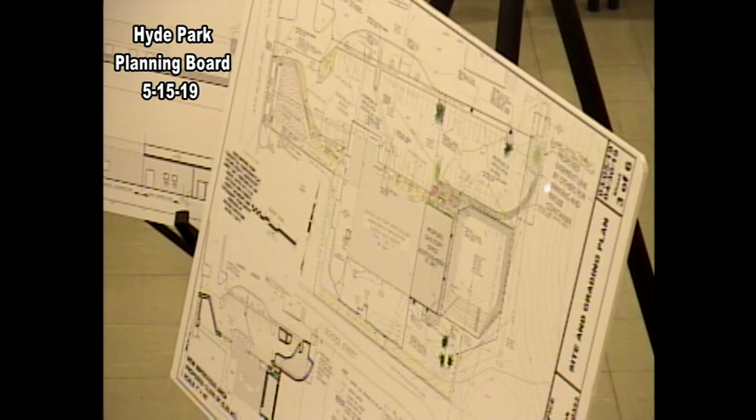We just wait till they're proposed and then try to work with somebody to make it look better. But 9G is ripe for improvement, so I applaud anything that you can do, given Mr. Waters' suggestions, to do so. I think the landscaping is fine as proposed. I hate to see the loss of all the green space in through here, but I like the fact that you also added the sidewalk in through here, so almost everything that you compensated for, I agree with.

One note, I'm sorry, I didn't get a chance to relook at the plans, but it says look to sheet A6, it's referred to. There's no A6 submitted that I can find. I don't know if it got left off or what. Did you find it? It's a 6-sheet plan set, and one of the sheets happens to be a survey. It's a detail sheet. Oh, it's a numbers problem. Okay.

Got it. All these drawings are being done at the same time, so you think you're going to name it sheet six. Fine, I got you. I think it's named something else. Okay, you can just correct those, because I'm like, where's A6? I kept thinking, maybe it's me, then I asked other people. No, they all had it. The next set of elevations needs dimensions as well. Architectural renderings, I'm sorry.

If we say elevation, do you know what that means? Of course. No, I use the models. Okay. What word should we be using? Renderings or elevations? Well, an elevation is two-dimensional, a rendering is a representation of the site. That's an elevation, and that's a rendering. Right, those are renderings. That's what we thought. To Mr. Gleason it's still an elevation. That's a rendering over an elevation.

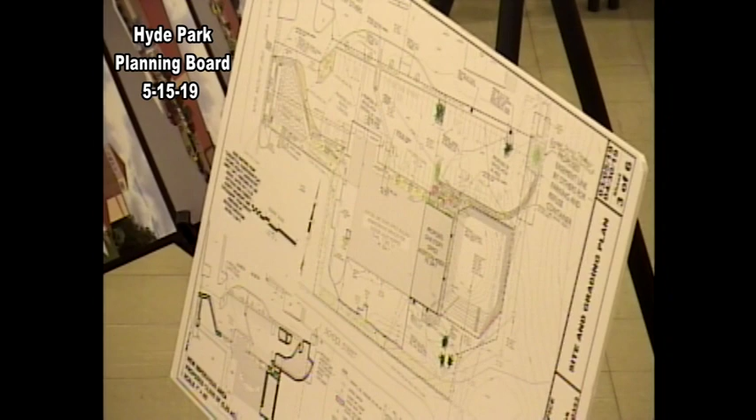So you do not show dimensions on the buildings? You're still supposed to label all dimensions for all structures. I know what you're thinking. We should still have it for the record, because remember, this is a new site plan. I can't refer back to the old site plan because this may be lost in time. So we have to have everything labeled like it's a full site plan, that's all. I saw the new ones, but we need dimensions on the existing, because it's a site plan.

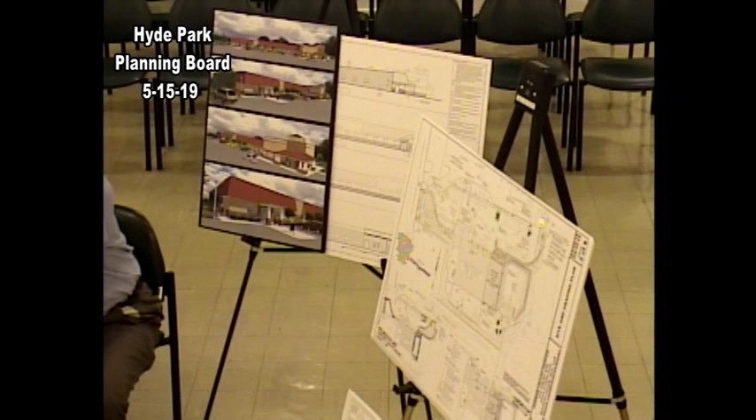Anybody else want to add any other comments on landscaping or sidewalks? Oh, right, that's in my earlier comments. The dumpster is shown here. No, it's still in an existing space. Where is it? Is that your dumpster? It's off-site. They're asking for an easement so that they can still use the dumpster. Just making sure that legally you have all that tied up, because I was like, wait a minute, their dumpster is off their parcel.

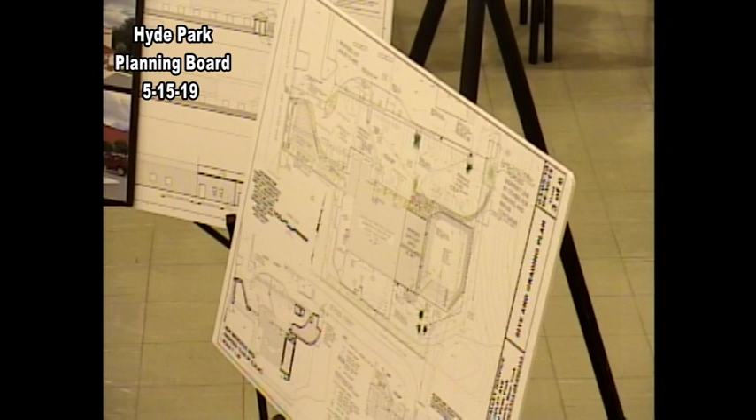It's mentioned in the cross easement agreement. Okay, good. And on the site plan, I put an easement notice. I thought there's no other place for you to put the dumpster. The way you drew the box makes it look like it's not in the easement area, but I think the easement area might be bigger than you've drawn it. That's what was confusing. The easement goes like this, and the dumpster's sitting right here. Isn't that the dumpster beyond the line? There's two dumpsters. Show both actual physical dumpsters in there.

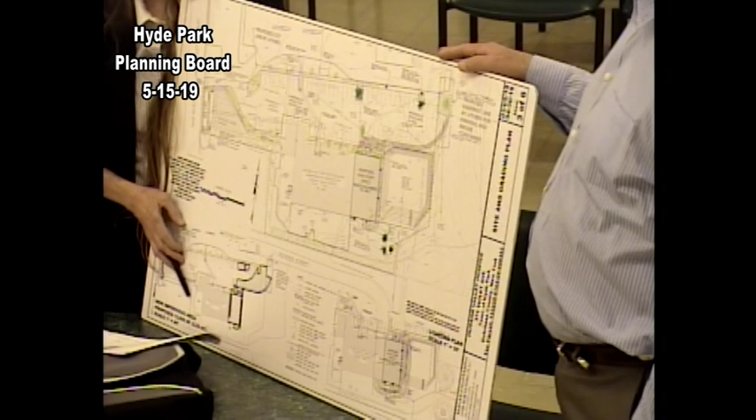We just didn't want it to be a problem. I was like, man, it's a big dumpster, it's going off the side of the easement. There's two dumpsters in here, one's ours. The one that's yours is on your lot. Yes. Okay, so we'll add them in there and label which one's ours. I honestly didn't realize there were two. It looks like it's over the easement. We will show the two dumpsters inside the double box and label the dumpster that's ours and the one that's not.

We just didn't want Mr. Page saying that you can't use his dumpster anymore. We will have that clear. No, we understood that. We will have that clear. There's going to be no question. So we'll wait to get the next revised plan set that'll show the new landscaping for the garden? Yes? My voice is going up in that stupid way, it means I'm asking a question. I was promised that, yes.

Okay. And then you two will meet, taking a look at Rob's designs to see if there's anything that you can incorporate to give it, as I said, an aesthetic upgrade. We're doing a facelift, upgrade. Yeah. And most of the other comments are really mostly Rob's comments, and other board members saying they like what he was proposing. That's basically it, so we'll wait to hear back from you. We'll schedule it out for the next meeting. Good. We're making progress. Thank you.

No, I know what Michelle wanted, which was someone to say, yes, I like the sidewalk placement, yes, I like this, yes, I like this, so you at least heard me say that. Thank you very much. Thank you. I look forward to continuing with this review. I'm actually getting excited by this.